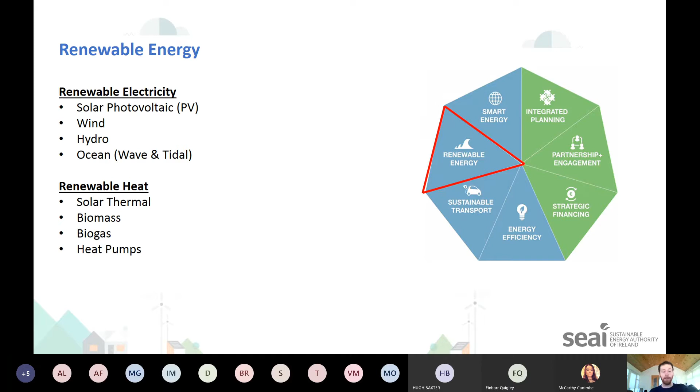Just to note, there will be another webinar on renewable electricity, I believe, next Wednesday - I'll confirm that at the end. But today we're going to talk about renewable heat.

Just to give some examples of what renewable energy might look like in a community, here's an image of a small village. You could have solar PV on local shops or cafes, which works well with 7-day businesses like petrol stations. Then you could have homes with solar thermal panels on their roof to provide some of the domestic hot water demand.

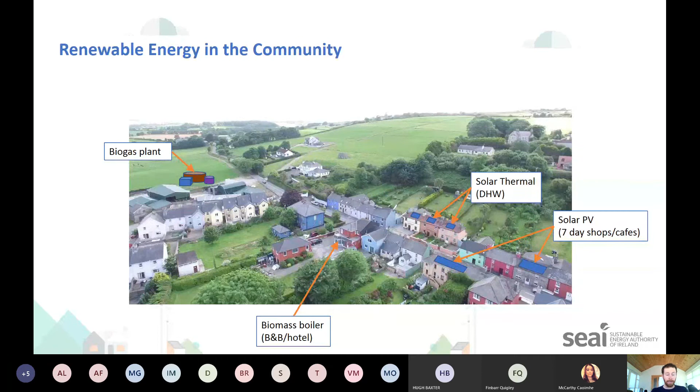I'm going to talk a bit more about that. You could have biomass boilers in your local B&B or hotel, and a biogas plant on a local farm in your town. That biogas plant could then provide heat to a district heating system - basically one large boiler providing heat to all these houses, with everyone having a separate heat meter rather than separate boilers. We'll talk more about that later.

Another set of houses might have heat pumps installed, but obviously they'd have to be insulated very well and airtight. You'd want your house to be hitting at least a B or C rating, if not more, in order to make a heat pump viable.

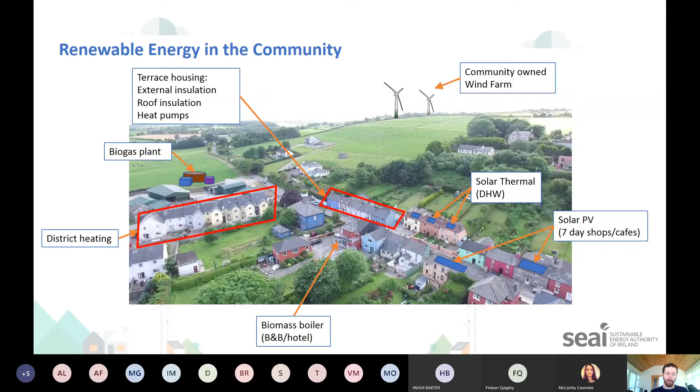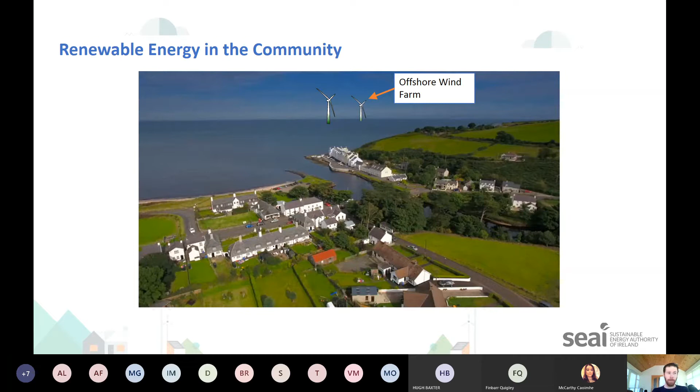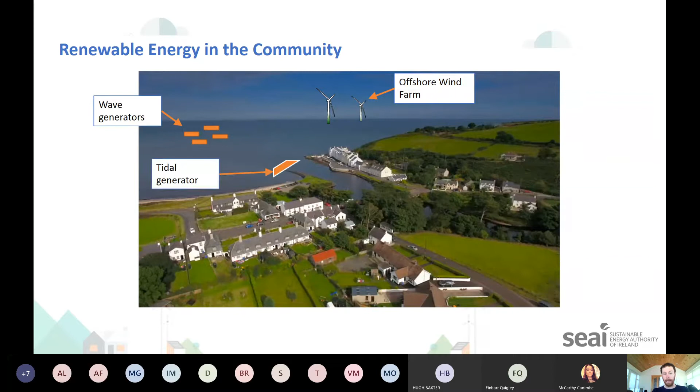As the community gets good at these small and medium scale projects, they might venture into community-owned wind farms. This is just an example of a community or village on the coast - instead of onshore wind, you could have an offshore wind farm, and the community can become part of these projects now through the new Renewable Electricity Support Scheme. There's also the idea that wave generators will hopefully see this kind of technology deployed over the next decade, and tidal generators too.

SEAI released their 2020 update about 2 or 3 weeks ago, and it's actually data from 2018 because it takes so long to collate all of the data from the different sources and evaluate it. So it's actually up to the end of 2018.

This is how Ireland has performed up to the end of 2018 versus our 2020 targets. Our overall target, as a member of the EU, is to reach 16% renewable energy by 2020, and up to the end of 2018, Ireland has reached 11% of that. We've split that overall energy target into transport energy, heat energy, and electricity.

Within transport energy, we have a 10% target of all transport energy to be renewable by 2020, and we've only reached 7.2% of that.

In heat, we have a target of 12% of all heat to be from renewable energy by 2020, and we've only hit 6.5% of that target.

And then electricity, we have a 40% target for 2020, and we've reached just over 33% of that target, again up to the end of 2018.

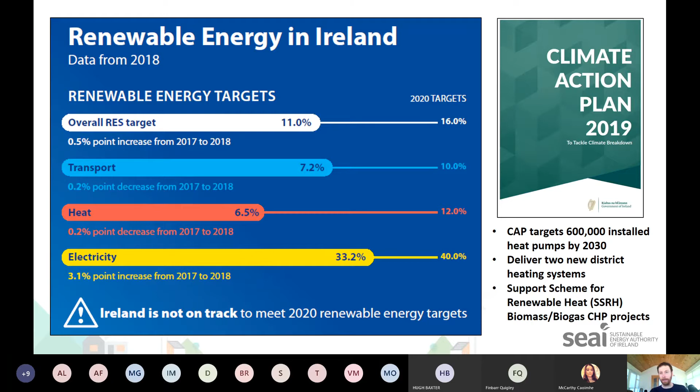Again, within the climate action plan, they're looking to deliver 2 new district heating systems. I'll talk a bit more about that towards the end of the presentation. And then obviously, you might be aware that SEAI now have the support scheme for renewable heat, which is supporting biomass and biogas technologies, either providing heat or heat and electricity. I'll talk a little bit more about that now.

So the support scheme for renewable heat is open to commercial, industrial, agricultural, district heating, public sector and other non-domestic heat users that aren't part of the European Emissions Trading Scheme. Entities that are part of the Emissions Trading Scheme, such as Dublin Airport and other large pharmaceuticals, large agri-dairy co-ops, are part of the ETS sector, so they're not able to apply for the support scheme for renewable heat. But if you think about your small or medium-sized businesses, such as hotels, they're able to apply for the support scheme for renewable heat.

So it's something worth thinking about in your community. The support scheme for renewable heat aims to bridge that gap between the installation and operating costs of renewable heating systems versus conventional fossil fuel alternatives.

A lot of these non-domestic users have oil or gas boilers, and they might come to the end of their life after 15 or 20 years, and a decision has to be made: do we replace that now with the same technology and lock ourselves into that carbon intensive decision? Do we continue to burn oil or gas for the next 15, 20 years again, not knowing what the price is going to be? Or do we look at an alternative option, such as this support scheme for renewable heat, take the jump and take that support from SEAI, and have a renewable heating system installed in our premises?

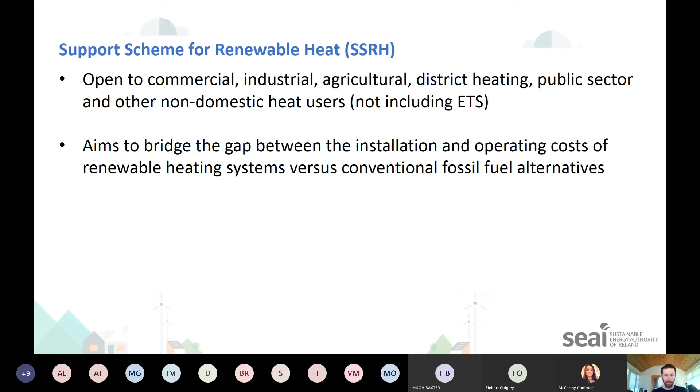So just to outline at a very high level, the scheme is going to support 2 things. It's going to support an installation grant, which covers about 30% or up to 30% of the cost of an air, ground or water source heat pump.

And then separately, it's going to support an ongoing operational support, a 15-year tariff based on usable heat output from either a biomass boiler or a biomass high efficiency combined heat and power unit, where you can burn wood to generate electricity and also generate heat. The ongoing operational support is also available for biogas, which is produced through a process called anaerobic digestion, and you can have a biogas boiler or again a biogas high efficiency combined heat and power unit.

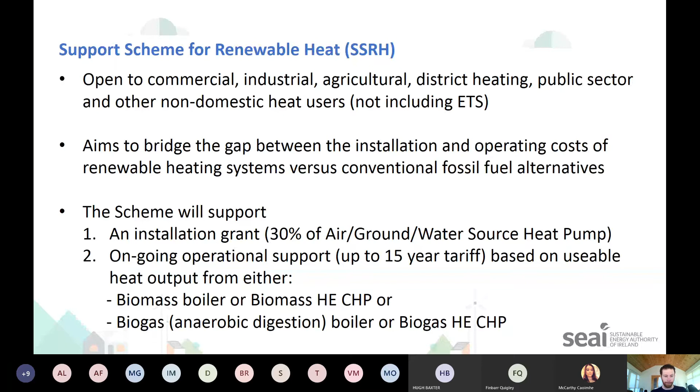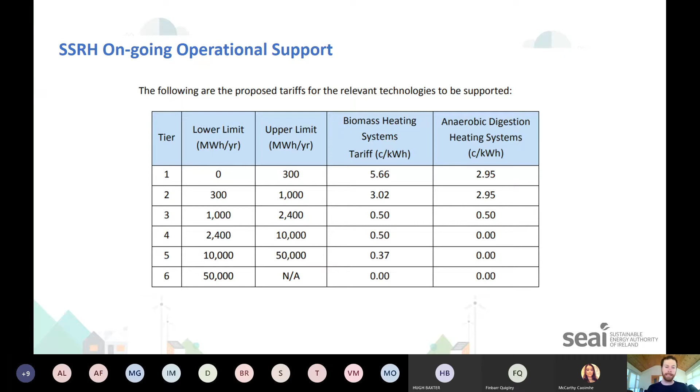So I'll talk a bit more about what biomass and biogas heating systems are now.

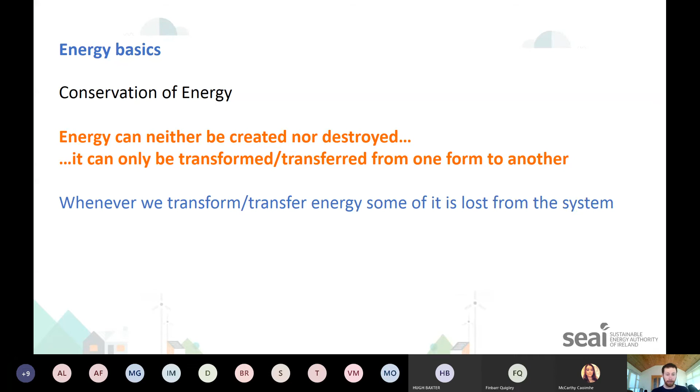Before we go into the detail of the different technologies, I'll talk a bit about some basics of energy, how we measure it, the quantities used, and some of the principles. When we talk about energy, we're talking about the conservation of energy, meaning energy can neither be created nor destroyed, it can only be transformed or transferred from one form into another. But whenever we transform or transfer energy, some of that energy is lost from the system.

To give an example of that, specifically in relation to an oil or gas boiler: on the left you have your oil or gas as a primary fuel, and that is chemical energy. Within that fuel, 100% of the energy is embodied in that chemical energy. We introduce the oil into our boiler, and it's transformed into heat through a combustion process. As it combusts that chemical energy, we lose some of that heat, about 10% in this example. So straight away you've gone from 100% energy down to 90% energy.

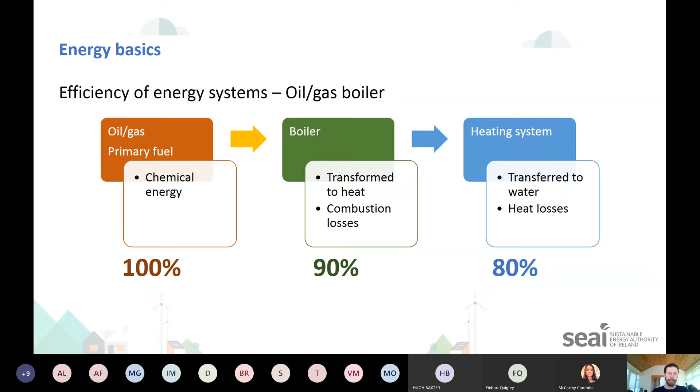From the oil being combusted and transforming into heat, we then transfer that heat energy into the water heating system in our homes, to run through our radiators. As we transfer it from the boiler into the heating system and radiators, we might lose another 10%. So you can see that anyone's boiler or heating system is about 80% efficient. This is just a high-level example; obviously some systems are more efficient than this.

Again, just to give an example in relation to electricity, for the efficiency of a wind turbine: you have your wind power on the left-hand side. Wind power is the kinetic energy of the wind, and again there's 100% energy within that. The wind turbine can only capture a certain amount because it only has 3 blades, so straight away you're only capturing about 55% of what's available. The energy then has to go from the turbine blades into the generator and gears, and there are some mechanical losses within that, so straight away you're down to 45%.

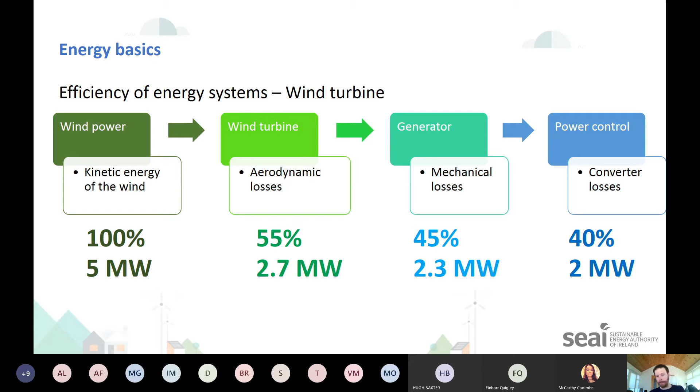And then you also have losses when you look at power control. You have to take that electricity generated on the wind farm - it's usually non-synchronous generation, so you can't just throw that onto the grid, because you'd be in trouble if that happened. It has to be turned into a usable form of energy for the grid, and again there are some losses in that. So you might take a 5 megawatt wind farm, and it's only actually producing maybe 2 megawatts of power when you factor in all the efficiency of the entire system.

Just a little bit about energy units and quantities: we have work, energy, and power, and these terms are used interchangeably and can sometimes be confused with each other. Work is the provision of something useful, such as heat, light, or motion. Energy is what we need in order to do work, and we measure energy in kilowatt hours and megawatt hours - you can see that on your electricity or gas bill. Your oil bill is in litres, but there are ways to convert that to kilowatt hours, which you'll see a little later. Then we have power, which is the rate at which work is done, so it's energy divided by time, and we measure power in watts, kilowatts, and megawatts.

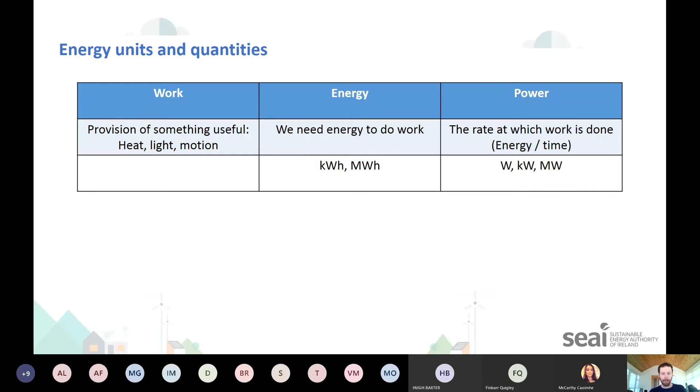Just to give some average household energy usage: the average house in Ireland might be a 3-bedroom semi-detached. That house will use approximately 11,000 kilowatt hours of thermal energy, and then for electricity, it'll use just over 4,000 kilowatt hours.

It's interesting to note that you spend almost the same on heating and putting electricity into your house, yet you're actually using more thermal energy. We'll see that again in another slide.

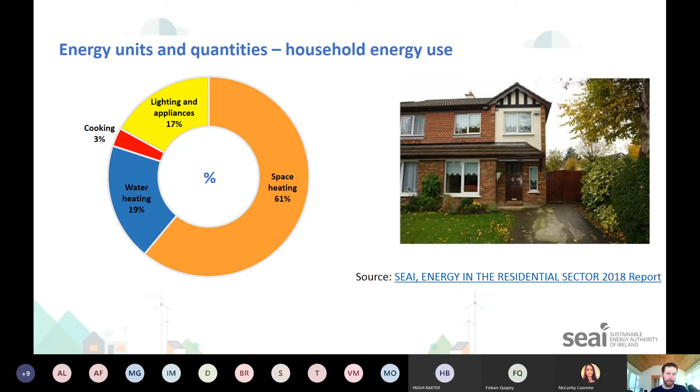This is just a pie chart to show where the energy is used. The majority is space heating, then water heating, then lighting and appliances, and then some cooking.

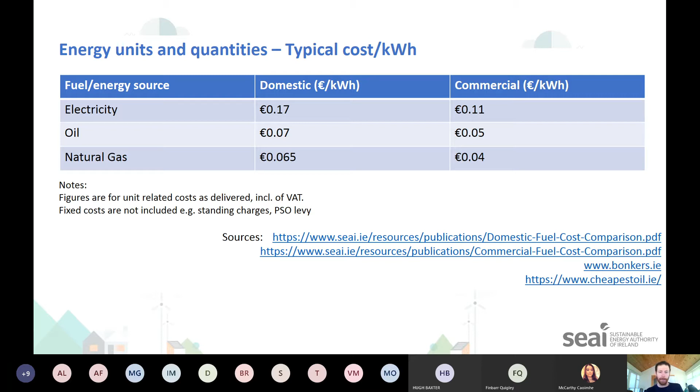You can see here the typical cost per kilowatt hour. Electricity in a domestic setting is approximately 17 cents per kilowatt hour. Oil is about 7 cents, and natural gas is even cheaper, less than 7 cents, about 6.5 cents per kilowatt hour. So per kilowatt hour, oil and gas are much cheaper. On the right hand side we've got some commercial rates as well.

That was just to go through some of the basic principles around energy use and the terms that are used. So I'll talk about solar energy now.

When we talk about solar energy, there's more than two things, but I won't go into all the details. There's solar PV electricity, and then there's solar thermal hot water. Today we're going to talk about solar thermal hot water.

There's another technology called concentrated solar power, which is a topic for another day, but it's very interesting - there's been some of those installed in countries with very hot climates. But today we're going to focus on solar thermal hot water.

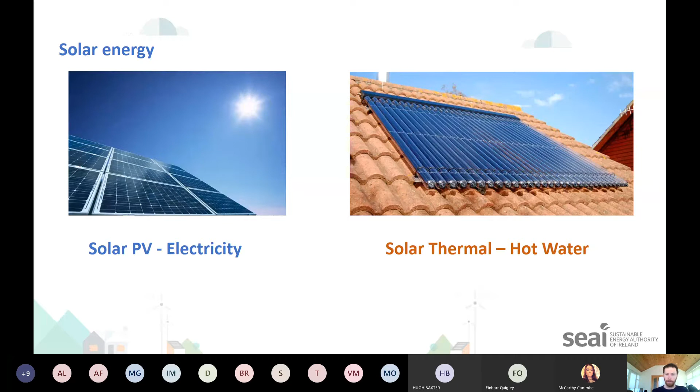There's different types of solar thermal hot water systems. You might see flat plate panels installed on people's roofs, and more commonly now we're seeing evacuated tube hot water systems, which work a little better in the Irish climate. I'll focus on these today since they're generally what people are installing now. The flat panels do work quite well, but the evacuated tubes are just a little more efficient.

This is a cross section of the evacuated tube panel. The evacuated tube absorbs solar energy and converts it to usable heat. There's a vacuum between the two glass layers which insulates against heat loss - the tube collects the solar rays going in, but they're not allowed back out.

The heat transfer fin, shown here on the right hand side, helps transfer the heat to the heat pipe. The heat pipe is a copper vacuum pipe that transfers heat from within the evacuated tube up to the manifold at the top of the solar panel. The manifold is an insulated box containing the contoured copper header pipe with dry connect sockets. This is how we capture heat from the sun into the solar thermal panel.

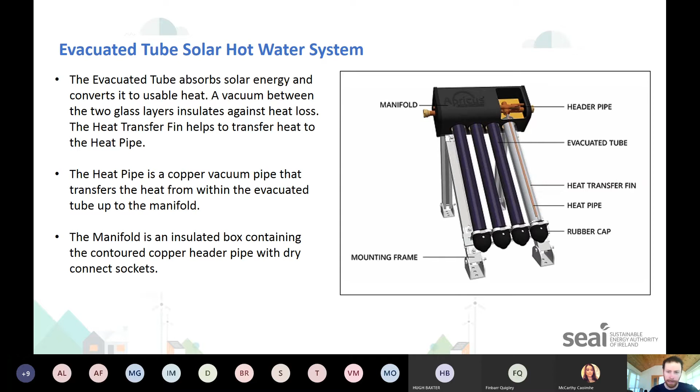You'll see in the next slide how that gets transferred through the hot water system. The sun's energy comes in through the evacuated tube panel - in this case it looks like a flat panel, but the principle is the same - and it comes in through a pump control station.

You're taking hot water out from the manifold of the solar panel and bringing it into your hot water cylinder, giving some of the heat from your solar panel into the cylinder. You're also getting heat through your oil or gas boiler, and you might have an immersion involved as well. So you have three sources of heat going into your hot water cylinder, producing water for your domestic hot water system.

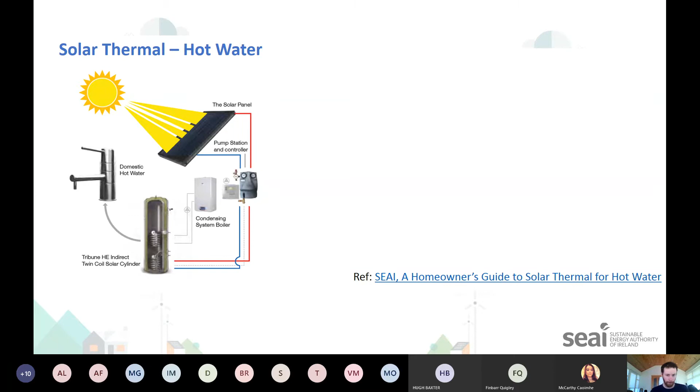Okay, so some of the considerations then when it comes to solar thermal. A well-designed system can supply between 50 and 70% of your domestic annual hot water requirement. That's for the hot water in your taps and in your bath, and not in your radiators.

Ideally, you're looking to have it installed on a south-facing roof at between a 30 and 45 degree angle, and it costs about 800 to 1,300 euro per metre squared of collector area. You would need about 6 metres squared for a 4 to 5 person household, so that system will cost you about 4,000 to 7,000 euro. The payback is generally about 8 years for a system such as this. And for that, SEAI will give you a grant of 1,200 euro towards that initial cost of 4,000 to 7,000 euro.

You can see there it suits a regular daily hot water demand.

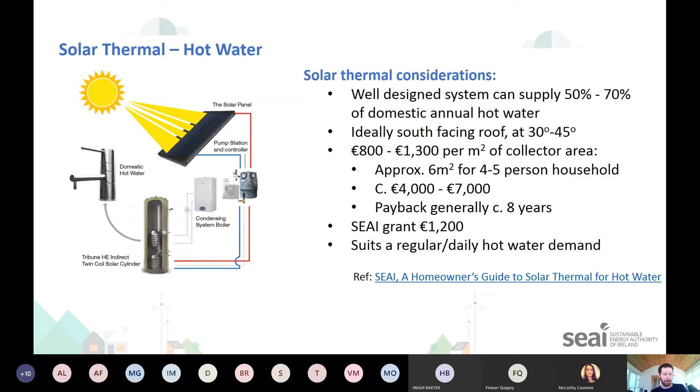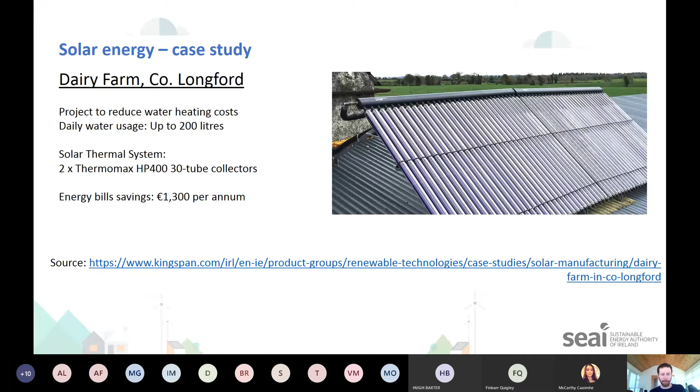This is just a short case study about a dairy farm in Longford that installed a couple of solar thermal panels, and it's saving 1,300 euro per year since it's installed it. So you can learn more about that at the link there. It's good to see some case studies of how these systems are working, not just in homes, but also in small businesses like this.

So then heat pumps, there's been a lot of talk about heat pumps recently. When we talk about heat pumps, the two main ones that people generally talk about are air source heat pumps and ground source heat pumps.

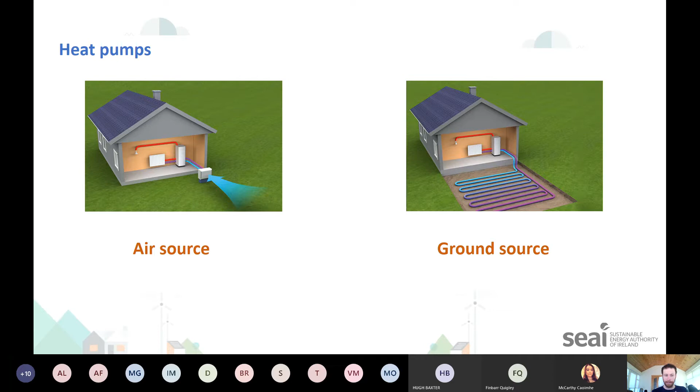One is taking energy from the air, picture on the left, it's taking the heat energy out of the air and then letting it out into the house. The one on the right is taking the heat energy that's available in the ground, and again it's taking it in through the heat pump and then into the home.

The question is often asked, is a heat pump renewable energy if it's using electricity from the electricity grid, whereby we're using a large proportion of wind to generate electricity. But we also have gas plants, peat plants, and some coal plants providing electricity to the grid. So that's why the question gets asked, is it renewable if your electricity source is actually coming from a fossil fuel? But the answer is, in fact, yes, because it does use electricity, but it uses that electricity to collect mostly free environmental energy.

Those free sources of energy are the air and the ground or water. The way we measure the effectiveness of a heat pump is the coefficient of performance. The coefficient of performance for a heat pump can be about 3 to 1, and some are up to 4.5 or 5 to 1. In general terms, we say the coefficient of performance is about 4 to 1.

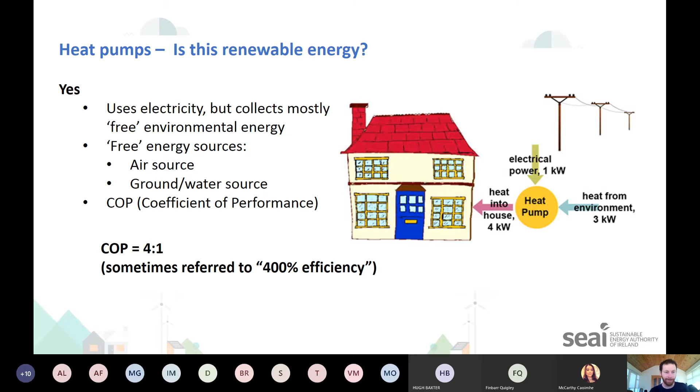So the basis of operation, how does a heat pump work? Often people say, oh sure, a heat pump's just like a fridge in reverse, but people might not necessarily know exactly how a fridge works, so I'll go into a little bit more detail. The operation of a heat pump is based on heat transfer, in that heat moves from something warm to something colder. So how do we get low environmental heat into our house?

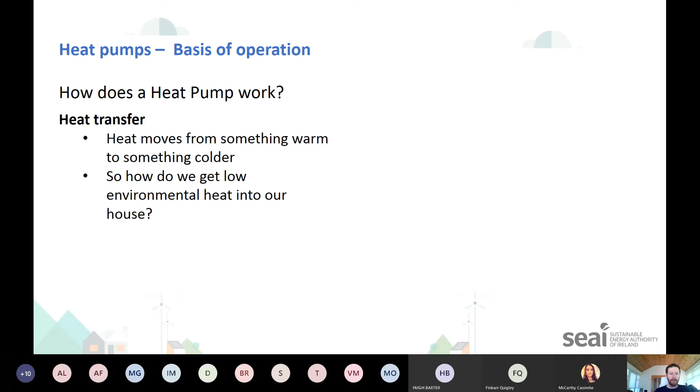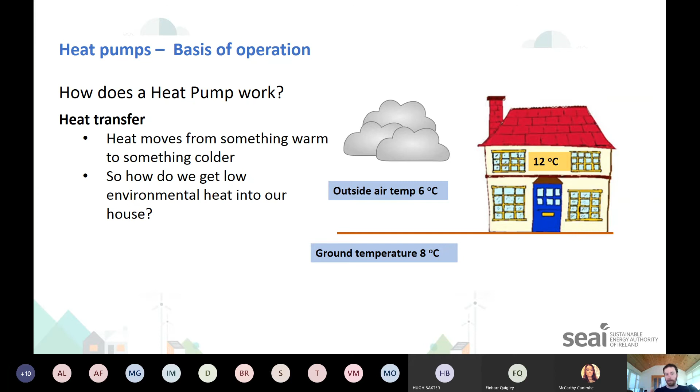This is just a typical example of a house. The house is at 12 degrees Celsius and the outside air temperature is at 6 degrees Celsius, and then your ground temperature might be at about 8 degrees Celsius. Obviously the heat from the house is getting taken away, it's moving from hot to cold, unless we reverse the trend and put heat into our home.

The real key to how these heat pumps work well is down to the refrigerant that's used. That's the medium that's circulated. It's what collects the heat and what gives off the heat on the other side of the heat loop.

It works on the basis that it has a very low boiling point of minus 48 degrees Celsius. That basically means if the outside air temperature or ground temperature is above minus 48 degrees C, there is an ability to take heat from that source, upgrade that heat, and give it into the house. Obviously your heat pump would have to work very hard at that temperature, but we don't often come up against that temperature in Ireland or indeed in Europe.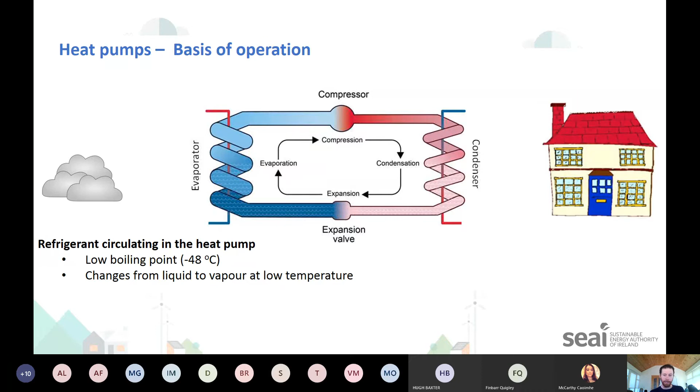So I'm going to talk about the evaporator on the left, in blue, with the blue arrow going upwards. The evaporator picks up free environmental heat as it passes through and changes into a vapor. Then it moves into the compressor, which uses electrical energy to increase the pressure and therefore temperature of the refrigerant.

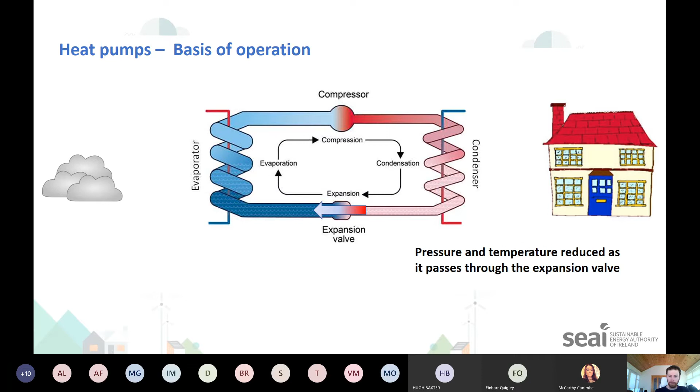Then it moves into the condenser. It releases heat to colder water in the heating system as it passes through the condenser, and changes from that vapor back into a liquid. Then the pressure and temperature are reduced as it passes through the expansion valve, and the cycle repeats itself.

So you might have your refrigerant, on the bottom left of the diagram, coming out at 3 degrees Celsius. It passes through the evaporator, which is outside the house. You've then picked up some energy, so you're now at the point where it says primary circuit, and you've gone from that 3 degrees Celsius up to 6 degrees.

You're going to further use the compressor to increase the amount of energy from that 3 to 6 degrees. You're also going to take some heat from your secondary circuit, some of the residual heat in your home, and then bring that back through the condenser, take the energy out, and it could be up to 40 degrees Celsius to provide some of your hot water requirement, and it'll also heat your home to a comfortable 20 degrees C.

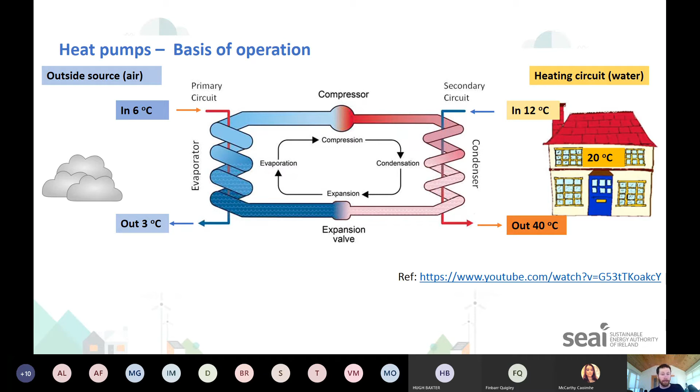Okay, so that's just a very basic explanation of how a heat pump works.

So some considerations then when we're talking about heat pumps. An example on the diagram on the right is a ground source heat pump. You obviously have to have space for the collectors, either in your garden, or it might not work well in a small urban setting. Some consideration has to be given, and you can do it two ways: you can have horizontal loops, which need a wide area of land, or else you can do a vertical pipe to go deeper into the ground to get a better source of heat.

Again, these can be expensive things to install, but you can achieve higher COPs, your coefficient of performance, through this method.

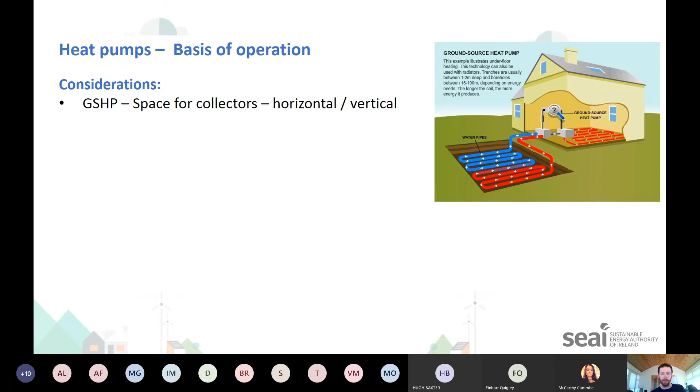And then we have air source heat pumps, and this is just an idea of what some of them look like. Heat pumps have been around for a long time. You see them on the sides of buildings, especially industrial units, for refrigeration, and they're not all too different from what you see. They're now putting them on the outside of homes that have been retrofitted, and new homes as well.

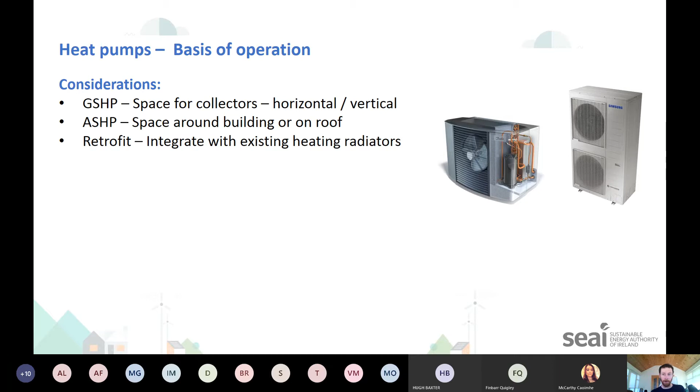Again, they can be used to retrofit with your existing radiator system. Your existing heating system, your radiators and your pipes and the water, you can still use that with a heat pump — it can be upgraded. You don't have to completely change your entire heating system, but your home does have to be properly airtight and have a very good BER.

Heat pumps are most efficient when they run at lower temperatures, so they don't work like your normal heating system. You might come home some evening and say the house is freezing, I'll just whack on the heating for an hour or two and be nice and warm. Then sometimes your house might get too warm. Heat pumps don't work on that basis.

They work on the basis of providing a nice, comfortable amount of heat throughout the day in a very efficient way. It works well if the home is well insulated and airtight, or what we call having minimised drafts - a fancy term for drafts is uncontrolled ventilation. A cold house will take longer to warm up, so heat pumps work best in a controlled environment, providing lower temperature over longer periods.

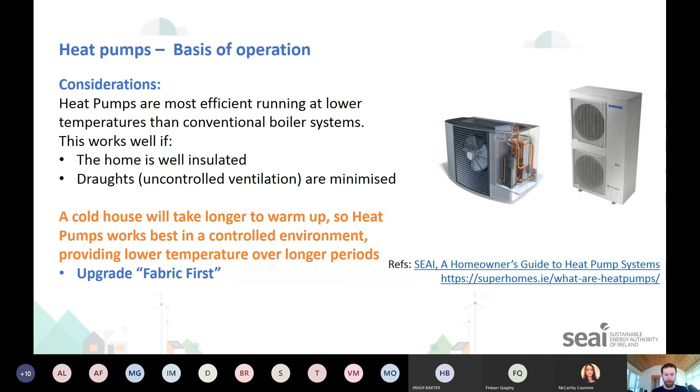This is SEAI's mantra: upgrade the fabric first, get your attic and your walls insulated, before considering a heat pump. You'll see a lot of new houses being built in order to meet the building regulations nowadays, and heat pumps are a good solution for that.

A retrofit in order to change out your gas or oil boiler might cost, depending on the size of your home, between 8 and 12 grand. And obviously a ventilation system will be required, what we call a mechanically ventilated heat recovery system. The payback can be over 11 years, but it depends on a number of things.

SEAI at the moment are offering grants of up to 3,500 if your home is pre-2011. The way you figure out if your home is pre-2011 is the date that the ESB networks have assigned an MPRN number, meter point reference number, to the house. SEAI are also giving a €600 grant for air-to-air heat pumps.

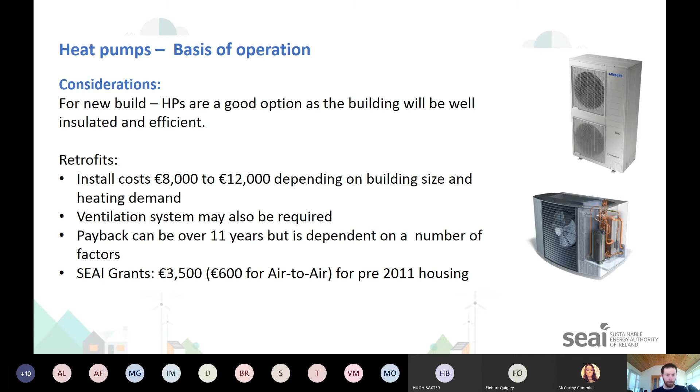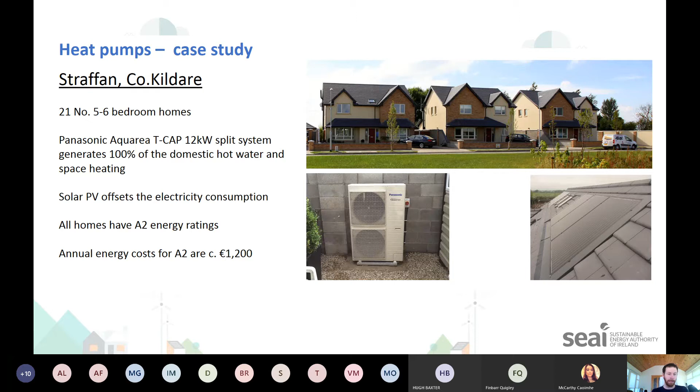Just some ideas then, conscious that not everyone on the call is currently part of an SEC - you might only be starting out, not fully aware of what the SEC program is. The SEC program involves joining the network, getting a community charter together, doing your competency development, applying to SEAI for Energy Master Plan funding, and then carrying out an Energy Master Plan for your local community.

This slide is just an example of what your community might decide to do as part of their Energy Master Plan activity, or EMP. You could identify and rank your residential areas in your SEC. With that funding from SEAI, you're able to employ a contractor, an energy contractor or energy consultant to carry out your Energy Master Plan.

So this could be something that your energy consultant could do for your community - get them to identify and rank your key residential areas in your SEC. You could target newer houses between 2000 and 2010, and the reason is because they're the cheaper houses to upgrade in order to facilitate the install of a heat pump.

You could also target areas with oil heating systems, and then next look at older houses which need a fabric upgrade to be suitable for a heat pump. Step 2 of that is to raise awareness.

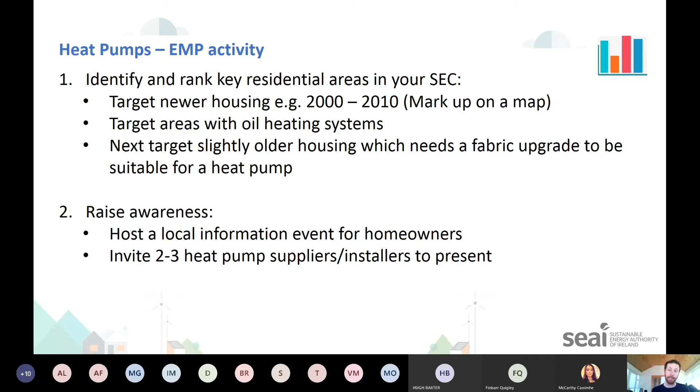You could host a local information event for homeowners and invite some heat pump suppliers and installers to present. You can find some SEAI registered contractors on the SEAI website that are operating in your area.

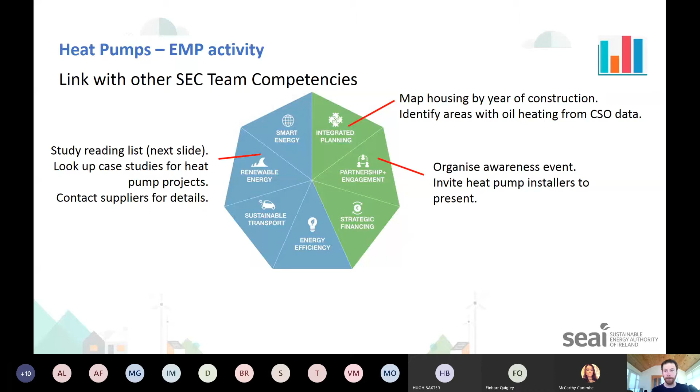This is just an example of how you're linking some of the core competencies together in order to develop a project idea or a proposal for your community, and there's the links to most of what we've discussed.

Okay, so biomass, biogas, and a little bit on district heating to get through. Biomass has taken a bit of a pounding in that recent Planet of the Humans documentary, directed by Michael Moore. It's worth a watch, but don't be fooled by it completely - it takes a very narrow view of renewable energy. But it does point out some problems with biomass in that it has to be sourced sustainably.

I'll just go through what biomass technology is at the moment. Some of the considerations for biomass: your site specifics - you have to have a good area to store your wood fuels, which could be logs, chips or pellets. Your boiler has to be close to that fuel store because it has to constantly feed the wood fuel into your boiler.

And then your supplier of fuel - you're looking for fuel that is about 30% moisture content. Ideally you want 25% moisture content, but 30% will do. If you're not achieving 30% moisture content, you're going to run into problems with your biomass boiler.

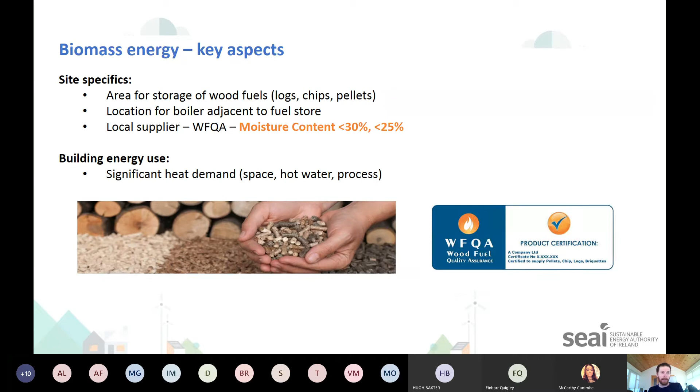That's just a note on gasification. It's another way of extracting energy from biomass. I won't go into too much detail. And then also you can have biomass for CHP, which is combined heat and power. So instead of just using biomass to produce heat, you can use it to produce heat and electricity. You could use the heat on your own site, and then possibly give or sell the electricity to a site close to you.

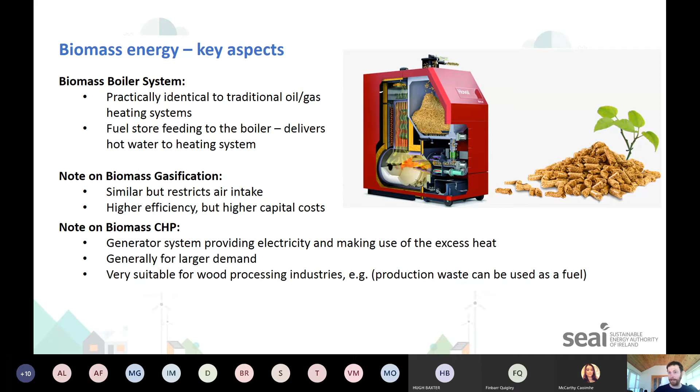Okay, so just to talk through some of the economics of biomass. The capital cost is based on system size, so obviously it's reliant on what supplier quotations you're getting. The savings are related to the cost of what you're already spending on energy and fuel.

So this is what you have to take into consideration. Oil is very cheap at the moment, but in general terms, kerosene for your heating oil costs about 6 cents per kilowatt hour. LPG bulk, if you're in a commercial or industrial building, is about 7 cents per kilowatt hour. You can see the clear drop: wood chips are about 4 cents per kilowatt hour, and wood pellets are 6 cents per kilowatt hour.

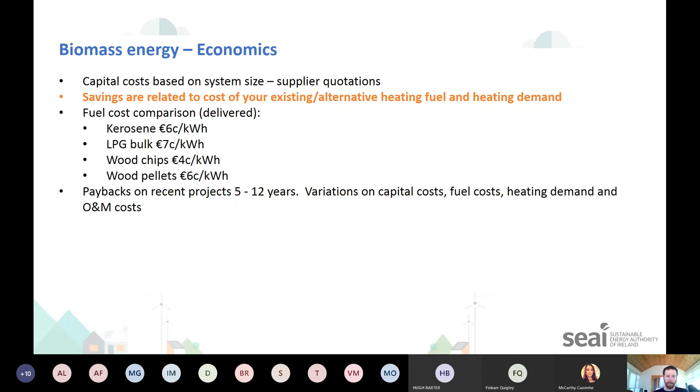So on some recent projects that my colleague Mel has looked at, there's been payback of between 5 and 12 years. This varies based on the upfront capital costs, the fuel costs that have been secured, and the length of term for that fuel supply contract, the actual heating demand of the building, and your operation and maintenance cost and O&M contract that you might have.

So again, just to talk about some of the key points, maintenance is very important: your ash removal, your feed auger servicing—this is how you're actually taking your wood fuel from where it's been stored into your biomass combustion chamber—and again, your combustion chamber cleaning. So these are just three of the things you have to keep an eye out for.

Again, most of the bad stories you hear about biomass, either in the domestic setting or non-domestic setting, are down to mechanical failure. It's been installed, possibly not commissioned well, and hasn't been maintained properly. You might be burning fuel that's too wet. So a lot of these things can in fact be avoided if it's set up correctly in the first place.

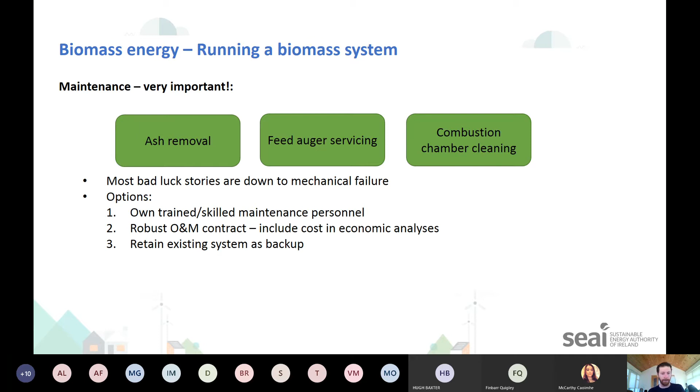And then some of the options are to have your own trained or skilled maintenance personnel. Again, as we talked about, a robust operation and maintenance contract—get your supplier to include this in the analysis. So you might get the installer to include a 5-year contract to install and maintain the system. And then obviously you have an option of retaining your existing system as backup.

And then this is just an idea about the types of local energy supply contracts that the market would like to see. It's helping more so large businesses make that jump from their fossil fuel heating system to this kind of system. So you'll have these local energy supply contracts, and they can work at different stages of the value chain.

So you see there the value chain is made up of, starting from the left, your finance and the specification and design of your system, actually building or installing that system, where are you getting your fuel from, what's the quality of that fuel, as we discussed, the operation and maintenance of your system, then obviously selling the output through the new support scheme for renewable heat that I talked about at the start. So you can see different companies will offer different parts of that value chain.

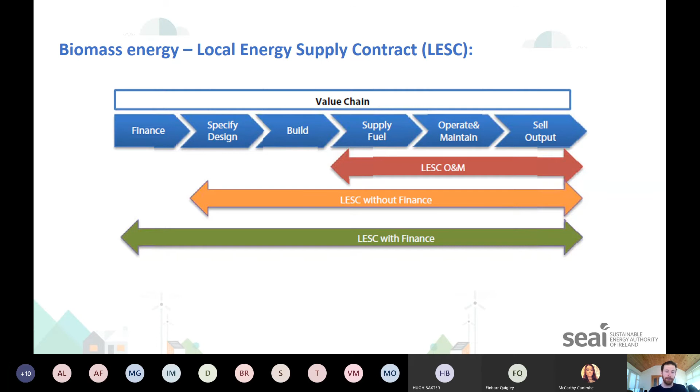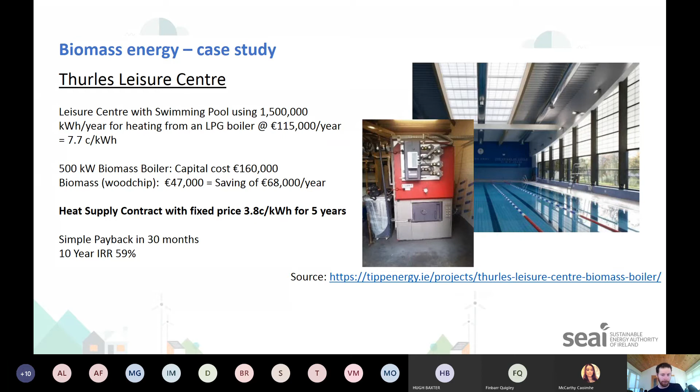Again, there's another case study. I won't dwell on that because I have a few more slides to get through, but there's a link there on that slide, and the slides will be shared with everyone, so you can go through that case study in your own time. There's also some energy master plan activity you can do if you or your community are interested in looking at biomass energy, with points you can discuss with your energy consultant and with businesses or non-domestic users in your town, city, or village.

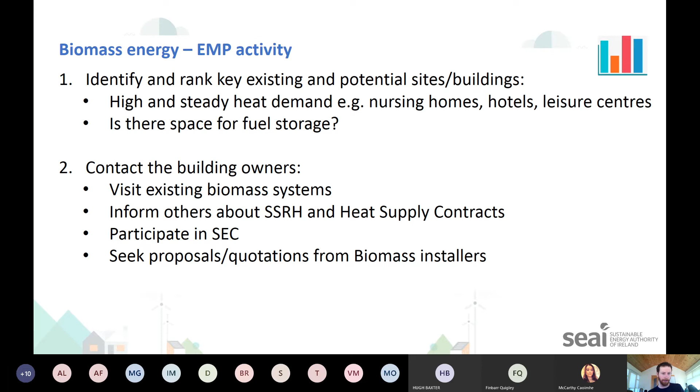So, biogas is generated through a process called anaerobic digestion. That's digestion in the absence of oxygen. Aerobic is with oxygen, anaerobic is without oxygen.

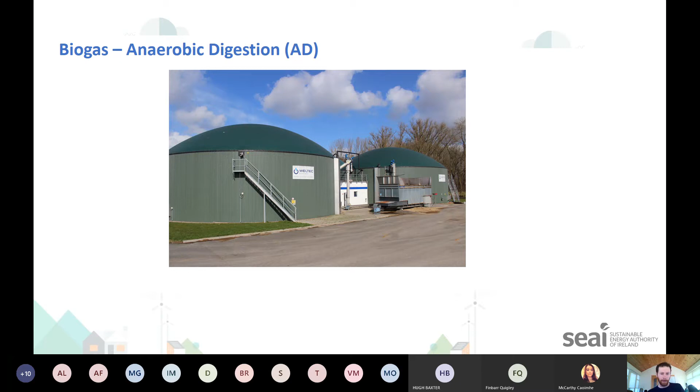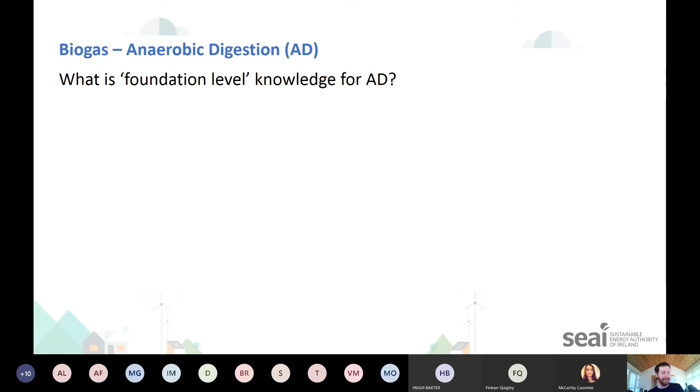This is what your typical AD plant looks like. We often ask, what is foundation level knowledge for AD? Every time I talk about AD with someone, I learn something I didn't know or unlearn something I thought I knew. It's a very scientific process. On the right hand side, I won't go through all of this in detail, but you have all these different chemical processes going on in order to digest your substrate and turn it into your fertilizer, biogas, and the other outputs.

So you have chemical processes called hydrolysis, acidogenesis, acetogenesis, and methanogenesis. It can be quite complicated.

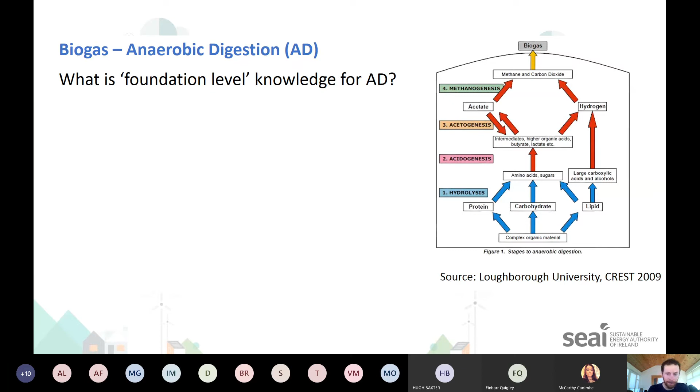It's important to point out that anaerobic digestion was actually originally developed to treat waste, because waste treatment is a huge cost for an agricultural business or even for a farmer. They have to treat their waste in accordance with EU regulations. So AD came about because of this, with the idea: this is costing us a fortune, why don't we try to treat this waste on our own land? And actually the byproduct of treating the waste is energy.

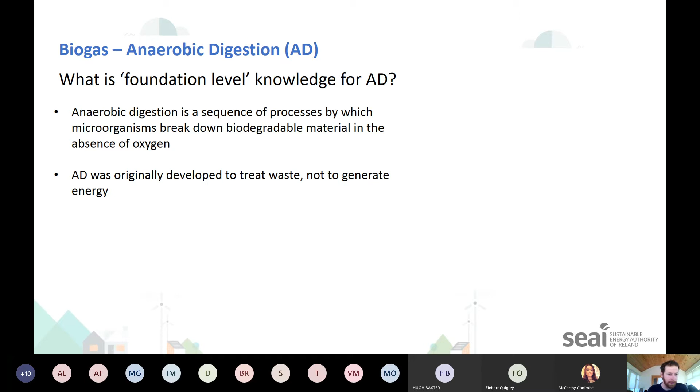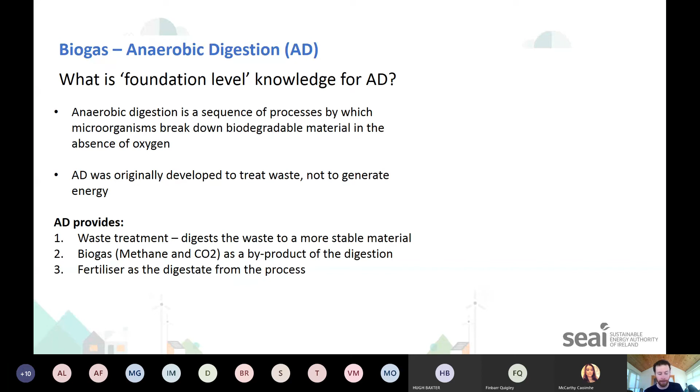In its simplest description, anaerobic digestion is a sequence of processes by which microorganisms break down biodegradable material in the absence of oxygen. So AD provides waste treatment, because it digests the waste into a more stable material - I'll talk about the different types of waste in a moment. It provides biogas, which is methane and CO2, as a byproduct of the digestion, and then fertilizer, a useful waste product left over from the process.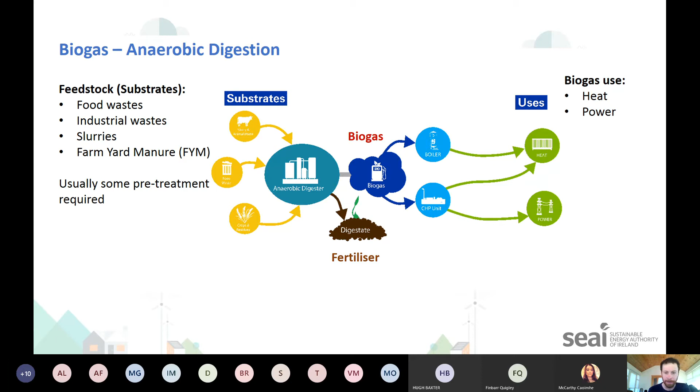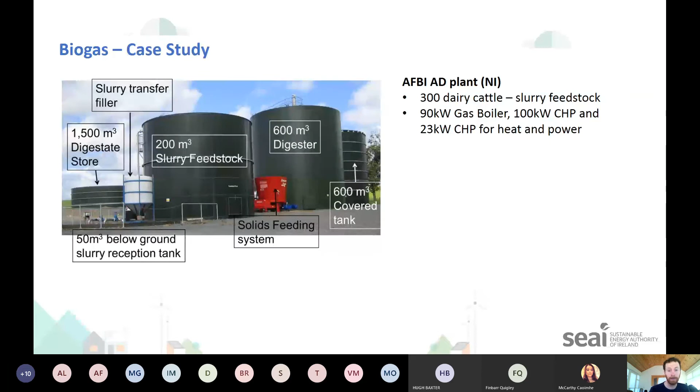This is a case study giving an idea of what the different components of an AD system look like. This plant in Northern Ireland is for 300 dairy cattle, so the plant works off that slurry feedstock, and the biogas that comes off powers a 90 kilowatt gas boiler and a 100 kilowatt CHP, which produces 100 kilowatts of heat and 23 kilowatts of electricity.

You can see here an idea of what a district heating system might look like. It's a fairly basic concept - you're not just heating one building, you're heating a couple of buildings, piping that heat between them.

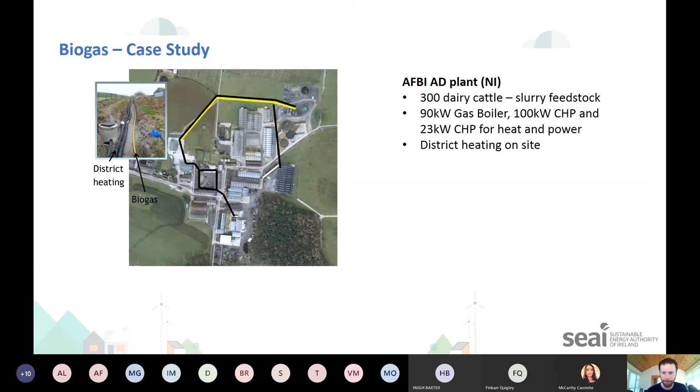This gives you an idea of the actual value, and in your own time you can go through this in detail. Starting at the top, you have your dairy cow slurry, one ton, going through your digester, and then you're producing biofertilizer.

That ton of cow slurry is turned into biofertilizer worth £5.42. Taking your digester, you're generating biogas, and the electricity you can use once you've taken away what you're using on site is worth about £6.60 per kilowatt hour of electricity. Then there's also a value to the heat. So from a ton of cow slurry, you have a total value of £12.57 for your fertilizer, your electricity, and your heat.

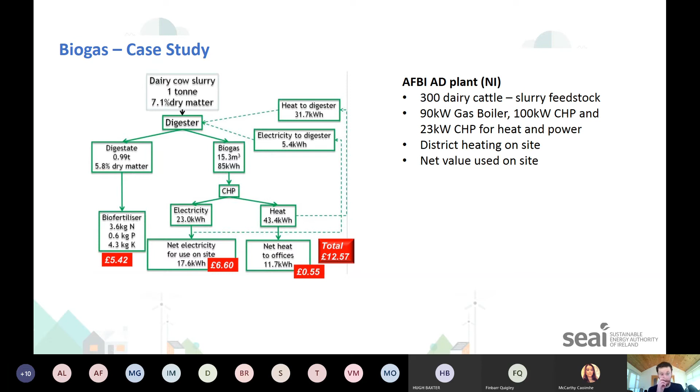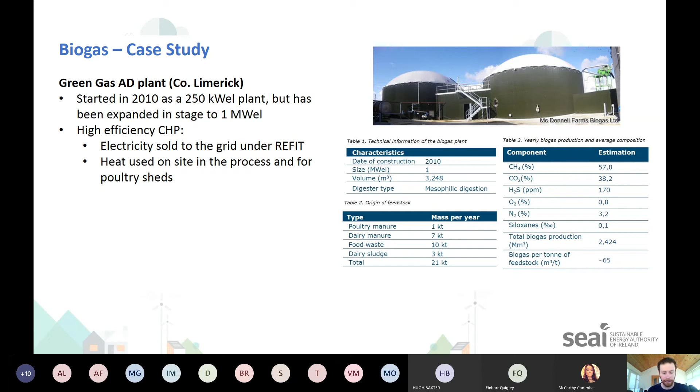Another case study, something closer to home in County Limerick, the Green Gas AD plant has actually turned that into a high efficiency combined heat and power plant. We'd like to see more of these things, and it's definitely a way for agriculture to take part in the climate transition. There's also some energy master plan activity you can do if you or your community are interested in biogas or anaerobic digestion.

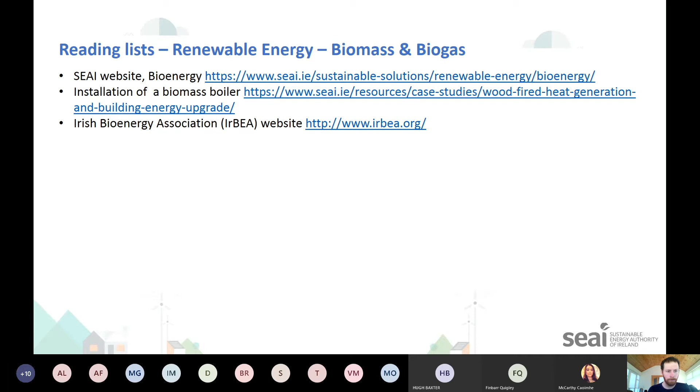I just have two or three slides left, then I'll pass you over to Mel. So just a quick update on district heating. District heating has been used for decades across Europe. It's kind of associated with Eastern Europe, but it's used very well also in Austria and elsewhere.

So what is a district heating system? It's a thermal energy network that distributes hot water through insulated supply and return pipes, and it can serve commercial, residential, institutional and industrial energy needs for space heating, hot water, space cooling and industrial purposes. On the right hand side, the unit with the yellow roof might be a data center or a waste incinerator producing excess heat. It can provide that heat to small businesses, homes, apartments, a hospital, and other smaller medium business users.

The advantages are much higher energy efficiencies. Instead of everyone installing separate boilers, you have one big boiler producing heat for everyone. You've got reduced consumption of energy resources, capital cost savings, and reduced operating and maintenance costs for commercial and residential customers.

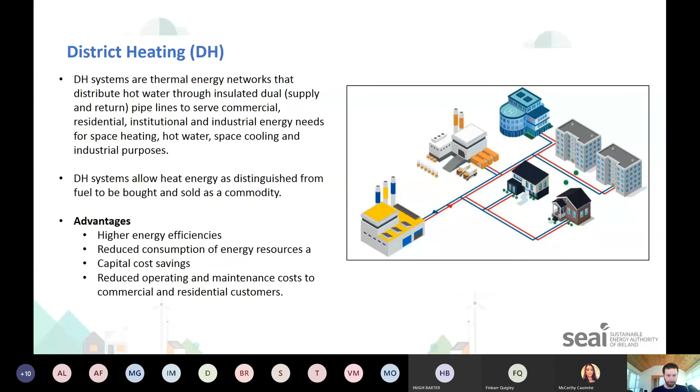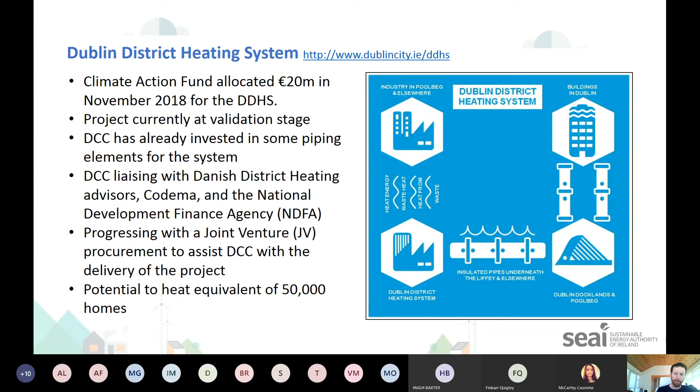This is just an image showing, on the top left, the waste incinerator at Poolbeg, using the waste heat from that and supplying it into a district heating system through pipes that will be piped into different buildings in the docklands around Dublin.

A similar scheme, albeit a little smaller, is the Tallaght district heating scheme. Again through this Climate Action Fund, it's secured 4.5 million, and it's being run by South Dublin County Council, SDCC. We're talking about using waste heat from the Amazon data centre. You can see in the map the energy centre, and the pink building at the top is the Amazon data centre. Data centres require a huge amount of cooling energy.

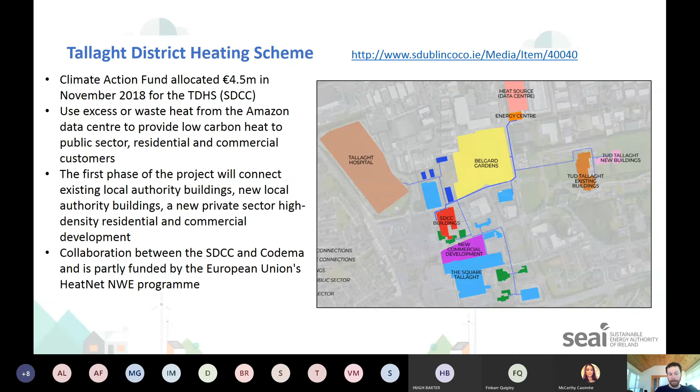So they're trying to take the heat from all the servers and put it into this district heating system, supplying different buildings in and around Tallaght with cheaper, cleaner energy. It's a good example of collaboration between a county council and energy agencies such as Codema, and an EU research program, showing what's possible when different entities act together for these climate action projects.

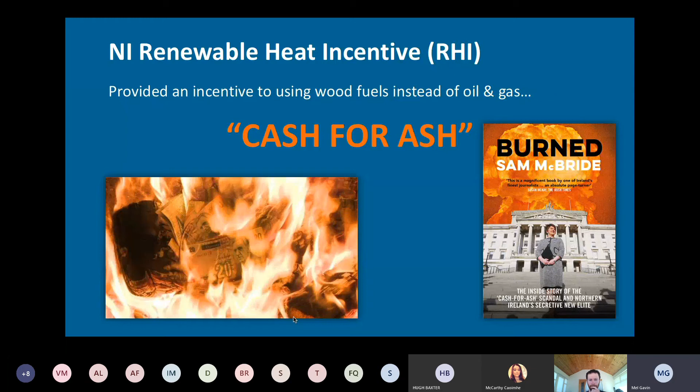So we go from here, from this example of good intentions and poor outcomes, to another example by British administration. Now, I'm not picking on the Brits here. It's just that there are a lot of administrations that made similar mistakes. It's just that this particular story lends itself to my story.

So this all occurred during the British colonial rule of India. Although Britain was involved in India with trade and exploration centuries ago, the colonial rule, or the Raj as it was called, lasted from sometime in the middle of the 19th century to about the middle of the 20th century.

So the governor of India decided to provide an incentive to the community to get rid of the cobra, and they offered a cobra bounty, which was a bounty for every dead cobra turned in to a police station.